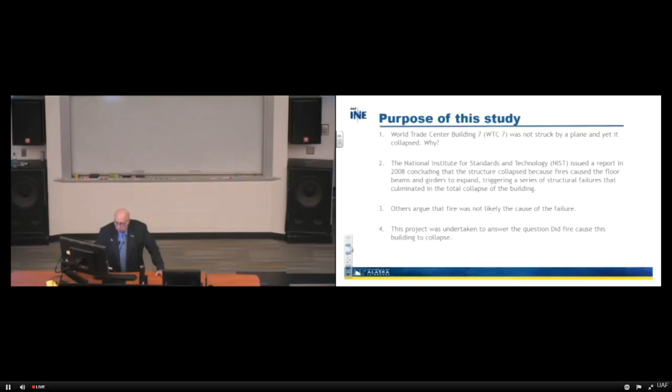Today, the methodology, I want to share that with you. We assembled first the available documents, construction drawings, etc., that were available for this project, for this building. Traditionally, I would have liked to have had the opportunity to go in and pick up all the pieces of the puzzle and put it back together like you would a typical airplane. They did not exist. It wasn't available.

So we've done the best we can with all the available documents, and basically what we did is create an AutoCAD drawing that we used to create a virtual geometry of this 47-story building. In digital form, you should be able to see every piece, every puzzle, every member, and it should look exactly like what was used in that structure. And so that's what we did.

We then prepared an Abaqus nonlinear computer model for the connections and for the framing of this building. That is a fairly sophisticated finite element program that's available that enables you to look in detail at how something is going to respond under a set of conditions.

So I know I have a mixed audience here. I'll try to keep it as simple as I can. At the same time, I need to share with you some pieces of complexity so those in the technical arena have an appreciation for the fact that, okay, they did look at this in a fairly sophisticated way. There's several things here that I haven't talked about.

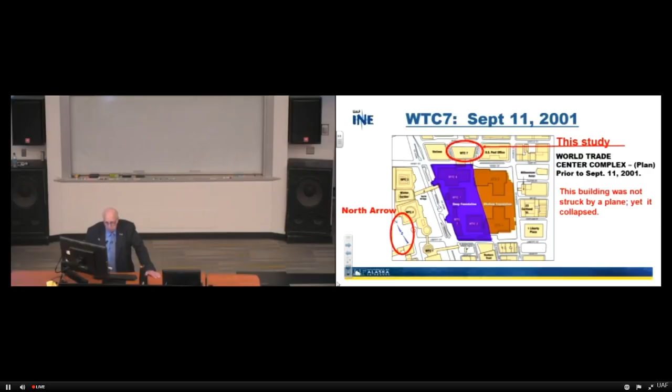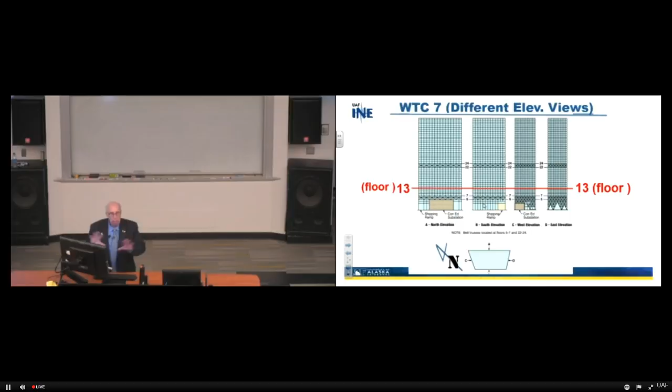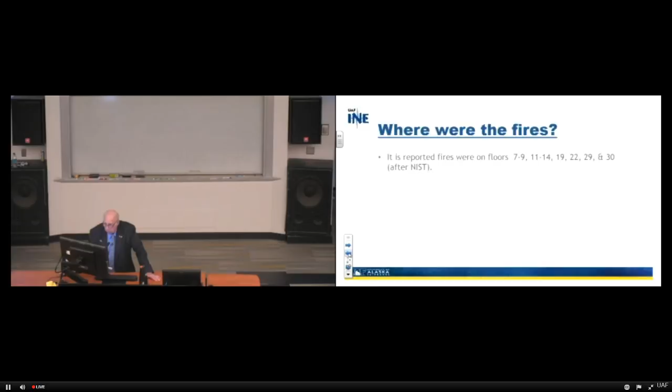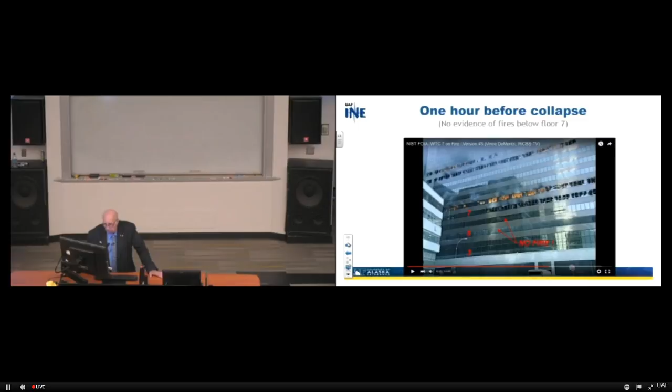All right, so now moving on with that idea in mind. We've got all that captured in our minds, we're ready to go. So there were no shear studs installed on the building girders.

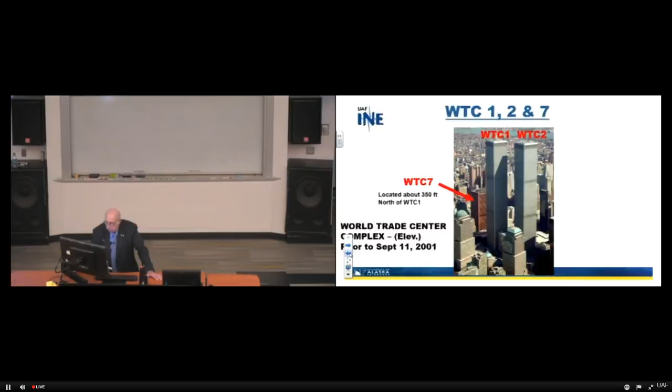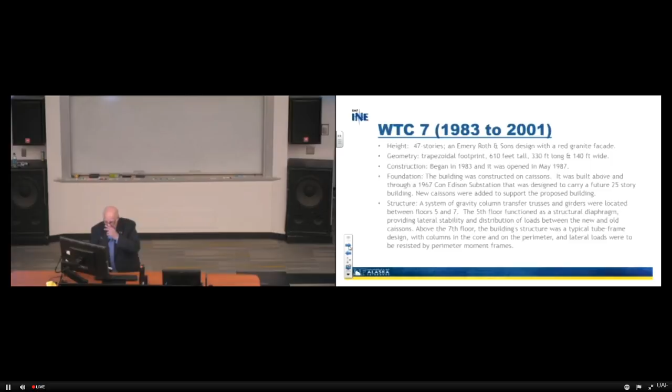Okay? So, going backwards here or something. Hang on a second, I'm going crazy. Too much fun. All right.

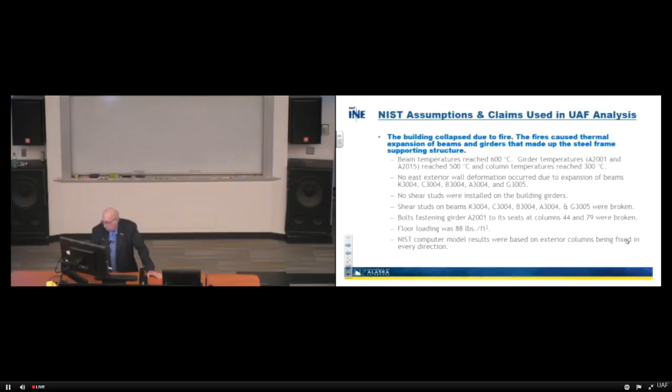So they've lost those supports. That means those two columns no longer have lateral support at that level, and did they possibly have a problem later? The floor loading was 88 pounds per square foot. The NIST computer model results were based on exterior columns being fixed in every direction. That's kind of a significant thought.

All right, so now, looking at their plans, this stuff came out of the NIST report, page 343, 2008. This gives you the geometry, that's a 45-foot length from 44 to 79. 45 foot, that's a girder length, longer than this, for sure.

You see what I'm saying? That's not small. This is a huge building, 600 feet across. I mean, for God's sake. So here is 50-some feet here, 54 feet across. This is our exterior wall. I'm in the northeast corner of this building. Is that clear to everybody?

Here we are in that trapezoid world. Notice that there's asymmetric framing. These beams, those beams, for God's sake, are 52 feet long. That's not small. I mean, where in the world do you see that kind of stuff?

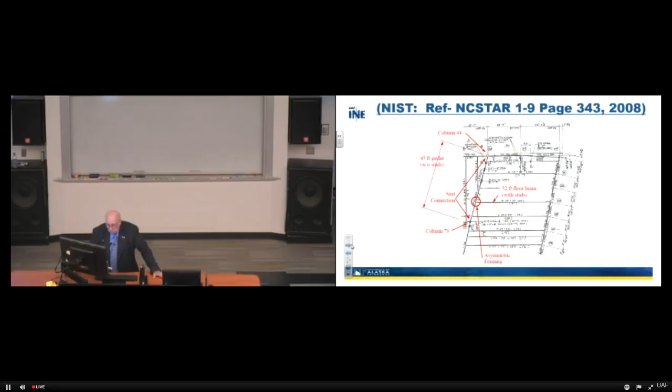So anyway, in their view, by taking a heat model, putting fire on it and then subjecting their finite element model to an increase in temperature, they got a thermal expansion. Their thermal expansion looks like this.

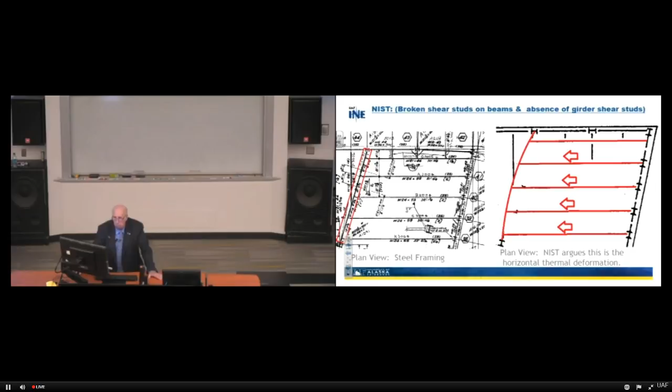So that actually is this girder right here, A2001. It expanded, and they said it pushed off of this seat, bearing seat, and thereby they lost support. And then these cascaded downward, okay? So that's basically what we're talking about here. There's that girder I'm talking about, there's that exterior, and here are lateral supports for this beam system through here.

So what were their conclusions? First of all, their fire-induced weakening of critical columns did not cause WTC7 to collapse. Okay, didn't get hot enough. They're saying that 300 degrees is not hot enough. No argument. Temperature in column 79 was below 200 degrees C. I think that's true, I might have to look that up as a reference again, but I'm pretty sure that's about what it was.

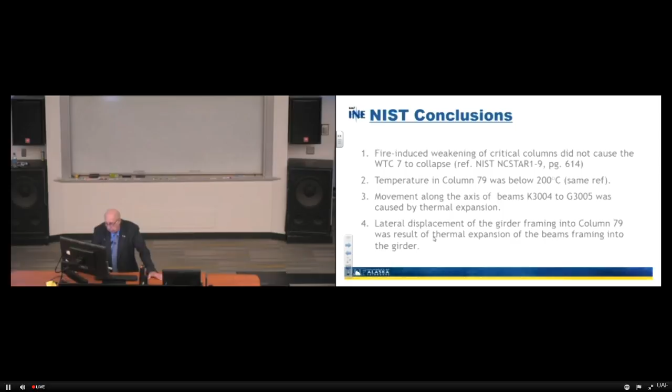Movement along the axes of beams K3004 to G3005 was caused by thermal expansion. Then the lateral displacement of the girder framing into column 79 was a result of thermal expansion of the beams framing into the girder. All we're saying here is when these heated up, they got longer. This was fixed, so they're all going to move to the left. That means they move what direction? West. And in moving so far west, what happens? Well, they're going to try to move, and is there enough space to hold them in place?

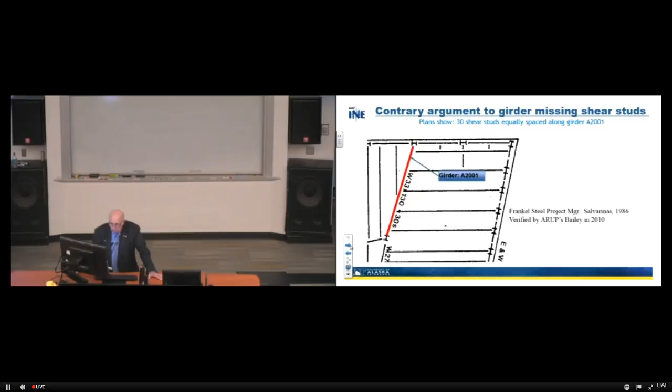That's what their argument is, right? That's key right there. And that's what it looked like. Bang, bang, bang, bang, right? This thing bowed outward. And so this moved and that moved. This is the cascade issue that they said.

Okay, so the buckling initiated here at this place right here, at floor 9. And then all these issues means that they lost lateral support of that column. This is column 79, by the way, the one we've been focusing on. That column doesn't have any lateral support, and because of that length, it cannot take nearly as much load as it was designed for. And so consequently, the vertical support and lateral restraint in the north only, and so therefore there's a huge problem. And then there's full lateral support up here, and then there's partial lateral support down below, down here at the very bottom in the kind of Edison area.

Those are all laterally supported. But between this zone, they said, went away. So the loss of lateral support for 9 stories, floors 6 to 13, caused buckling to initiate, which means you lost it. Is that clear? Everybody clear about what I'm saying here?

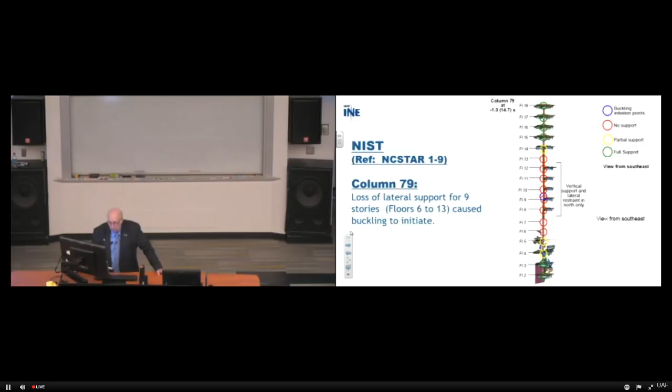Now let's take a look at their model for a moment. This is looking at a partial of that trapezoid, down here, partial. We're seeing a partial of it. This is the northeast corner. There's column 79, and in that blue, it's kind of significant. That blue is where they put, at every place a beam and a girder come together, a column to a girder goes together, a beam to all these kind of things.

There's a connection that's on the drawings that says, here's how you will build it. You bolt it together, you make it do whatever you want it to do, and that's the way it was supposed to be built. Remember that the north arrow is here, this is the west side, the east side is to my right. This is after NIST, the area of floor where connections were modeled on floors 8 to 14, and that's in the blue area.

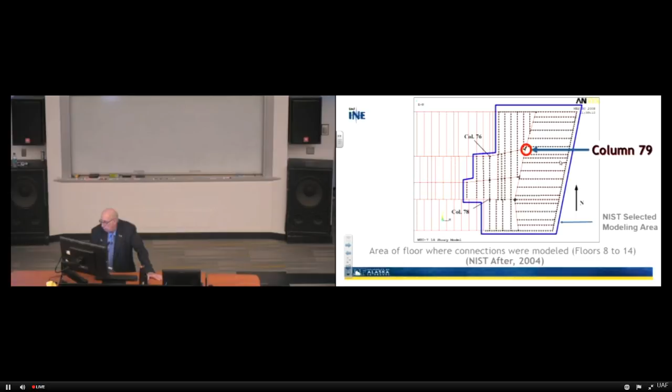Over here, that wasn't done. So there's column 79, here's the area outside of the thing, and so now let's take a look. Outside the selected area, connection failures were not modeled. NIST used fixed or pin connections.

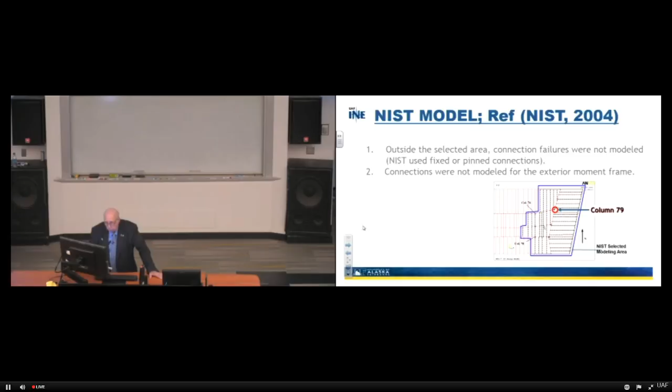So automatically, you have to ask yourself the question: do they have the same stiffness as what you were modeling here more accurately? And the corresponding question is, does it have an influence? Does it change how the system is going to respond? So the connections were not modeled for the exterior frame, and the columns themselves were treated as fixed.

Also in the NIST documentation, page 525, 2008, a girder was considered to have lost vertical support when its web was no longer supported by the bearing seat. That means if there's loss of bearing support on A2001 coming into the column 79, then it's lost. The bearing seat at column 79 was 11 inches wide.

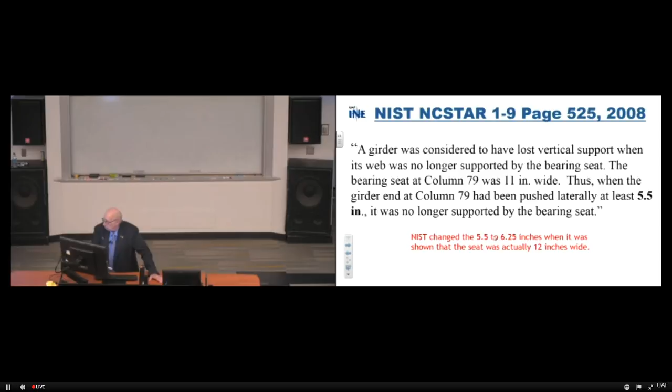Thus, when the girder end at column 79 had been pushed laterally at least 5.5 inches, the web over was no longer supported by that bearing seat. NIST changed that 5.5 inches to 6.25 inches when it was shown that the seat was actually 12 inches wide. So that's kind of something to think about. Why did that happen? And that was later.

So some of the NIST results are the following. And pardon me if this is a passion for me, but let's just take a look at what actually happened. Here's the NIST model, and remember those connections.

We're looking at this not from the south, we're looking at from the north, right? Isn't that right, Zilly? Or am I looking from the south? Yeah, that's the north face of the building. Exactly, north face of the building. So here's a penthouse up here, and here are, you're going to see two different situations here because of the connections issue.

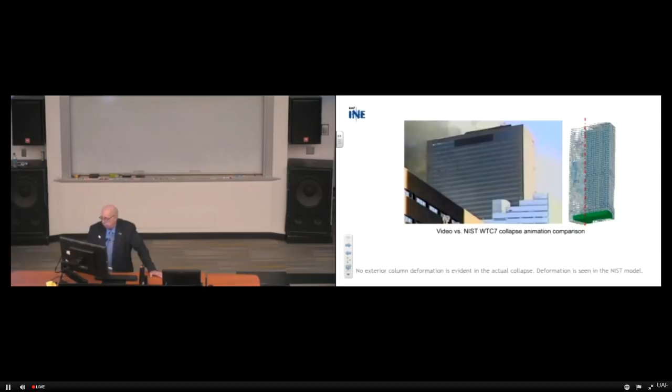Now let's see what this thing—and this is a real building. So here's their model, this is their progressive collapse, which I'm not going to show you ours yet. And here is this one, okay? And here is taking a look at the failure. Actually, that did occur that day. So one has to ask themselves, is that the same thing? Is that the same building? It looks like it behaves in an interesting sort of way.

Okay, so anyway, let's go on. Here's the NIST model that we were just looking at, and here is the other side, you see, flipped, that I'm showing you where that modeling was actually done. This is column 76, 78, and so 79 is in here. So they were looking at this finite element progressive model that they were using to look at that.

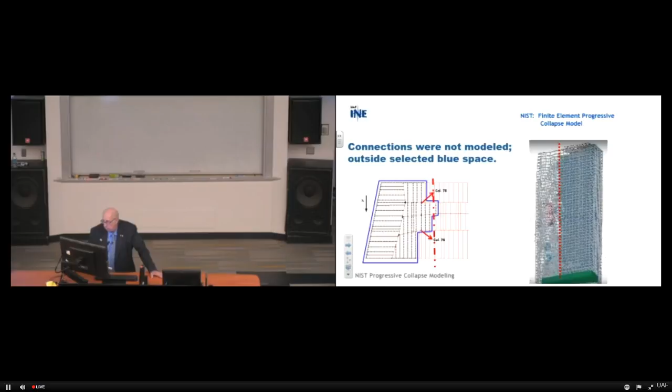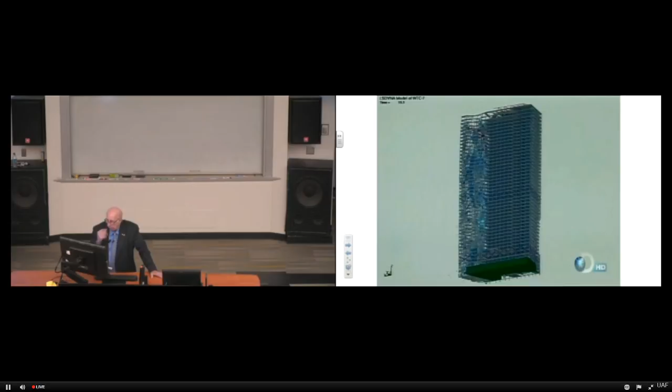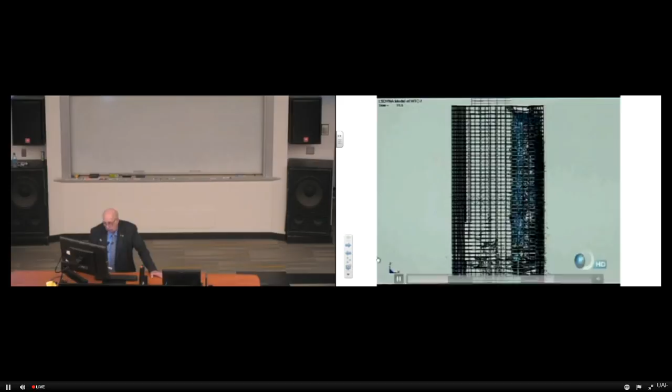Oh, I suppose we could even look at it from a different perspective. This is what they're doing. You have to ask yourself the question though, why is it so much different on one side than the other? Here's things that, because of some damage that came in from the debris falling through the windows and stuff, they're accounting for some of that.

All right, so let's talk about UAF for a moment. Analysis of the NIST collapse initiation hypothesis and propagation claims is really what we're about to embark upon, is how valid is some of this stuff from a science point of view.

So, UAF analysis of the NIST collapse initiation hypothesis and propagation: we created a solid model in Abaqus of the structural members in the northeast corner of the 13th floor of WTC7, and a finite element analysis was then performed to replicate the results claimed in the NIST WTC7 report that girder A2001 was pushed or rocked off its seats at columns 44 and 79 to initiate the collapse of the building.

So one might argue that if those things didn't happen, would the building have collapsed? So, okay, here we go. This is the area I'm dealing with, right in here. There's column 79, there's that girder A2001, there's 44 and 79. And the question then becomes, how does it behave?

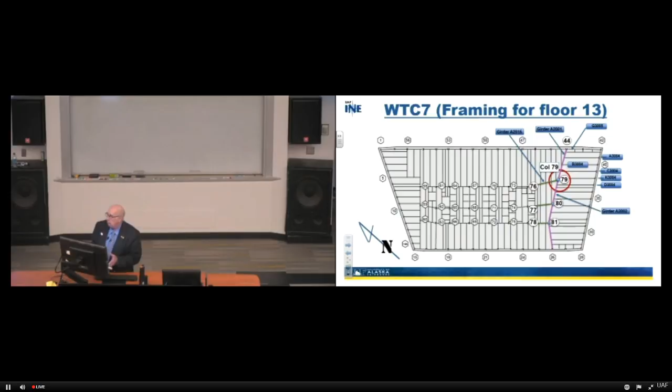So what we're going to do is create part of a finite element model, and we're going to be really conservative. We're going to force things to happen that's worse than the real world, okay? And in so doing, if we can't force failure, then it couldn't have happened. Are you with me on this point?

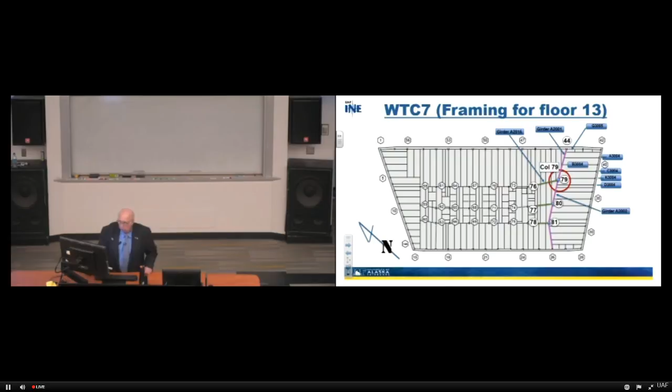All right, so that being said, we're going to fix the ends. We're going to force movement through girder A2015 by heating it up. This over here is going to be heated up. These beams are going to get heated up, and they're going to be fixed in the other direction. So we're pushing it each direction, making matters really, really the worst possible.

And this is what that model looks like before it gets run. So we don't have the entire floor system here - we do, by the way, have the entire floor system, but for this analysis, to evaluate what's going on right here at column 79, that girder, this condition, we're looking at what we need to do - that is, look at the boundary conditions to force that condition to be absolutely the worst possible.

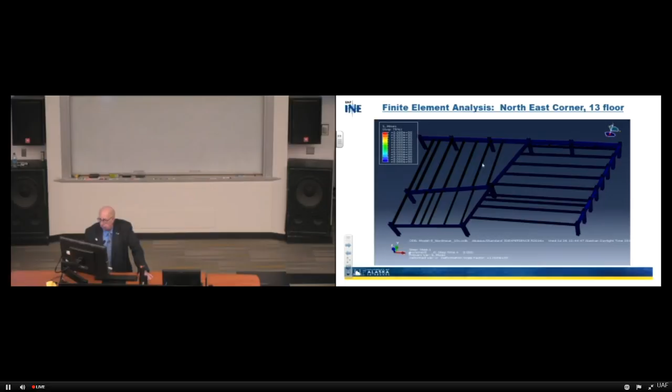Okay? We did that. And so this is the beginning - you'll notice everything's zero, the stresses are all zero, we haven't put the temperature on it yet. Okay, this is the column that we're talking about.

This column 79. This is real significant, by the way, because column 79 - do you know what I'm talking about when I say a W shape? A W shape looks like an H, and that's what we're looking at right here. That's what that column was made out of. It's a W14 by 730 standard structural shape. What that means is it's 14 inches deep, weighs 730 pounds a lineal foot. That's a chunk of change.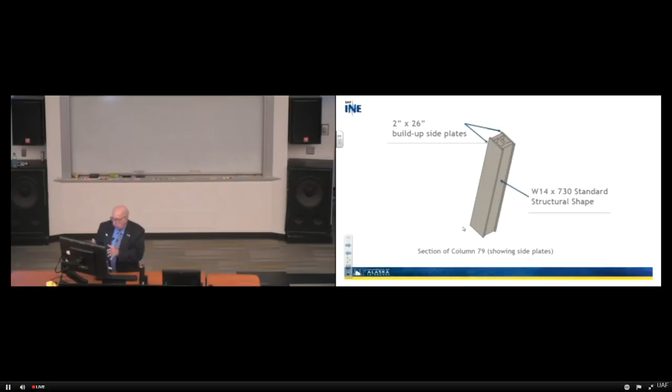Now within that context, what they did is they built side plates on it, and they closed that box. They closed it so it has structural integrity, resisting twist - significant. But those edges, those 2 inches by 26 inches buildup, means that there is a lip on each side of this, and they're going to literally put on that flange the bearing plate. Okay, are you following me? We're going to turn - that column stays vertical, but we're going to put a bearing plate in here.

Okay, so that's what it starts looking like. We're looking at it right now - plan view, A2001, going over to 44, and there's a connection to column 79. And see that lip right here? Those lips? Okay, got it? Understand? So if this thing starts moving, and it's getting shoved - if it's getting shoved to the west, which is to my left, probably your left too - then it can't get past that thing unless something happens or breaks, right? Does that make sense?

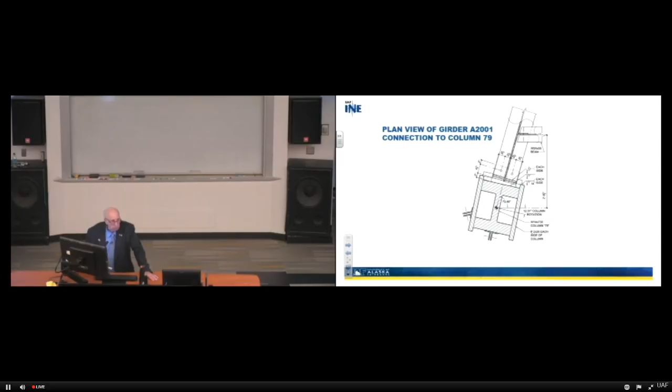And there it gets shoved. So the plan view of A2001 moving across its bearing seat at column 79, due to thermal expansion of the beams framing into the girder from the east, is here, and it gets shoved. Note that picture illustrates that A2001 is trapped by that column side plate, and it's not possible for it to move the girder web beyond the seat claimed by NIST. They're saying it got shoved off and fell down.

The fact of the matter is they didn't have the side plates on it. They weren't there in their model, so they wouldn't have found that. But yet they did exist in the structure in reality. It appears that NIST did not examine the side plate influence on the restriction of movement by that girder.

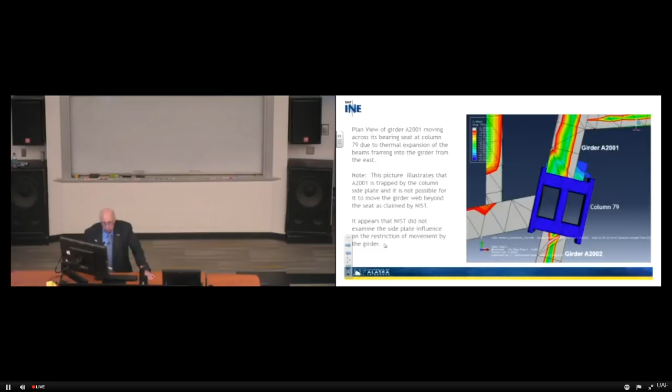Okay, so now let's take a look at what else we looked at. This is just part of the puzzle, because we've been playing this game for 2 years, so this is just a few weeks of stuff.

The model shows the influence of thermal expansion at the northeast corner of floor 13. Here we are: there's column 79, column 44, and there's the northeast corner, and here are the beams framing into that girder system. When girder A2001 is trapped behind the side plate on column 79, these beams begin to buckle.

In other words, they can't go in here. It's heating up, it's pushing, and they can't stand the amount of load axially that's been imposed upon it. So they begin to try to displace out of the way and relieve their states of stress. Are you following what I'm saying here?

So fundamentally that happens. This is out of the NIST WTC7 report, figure 8-22, showing basically the concrete slab, metal deck, all that kind of stuff. Exterior columns out here, this is basically column 79, column 44, and how that column is, and the girder here, and so forth, okay?

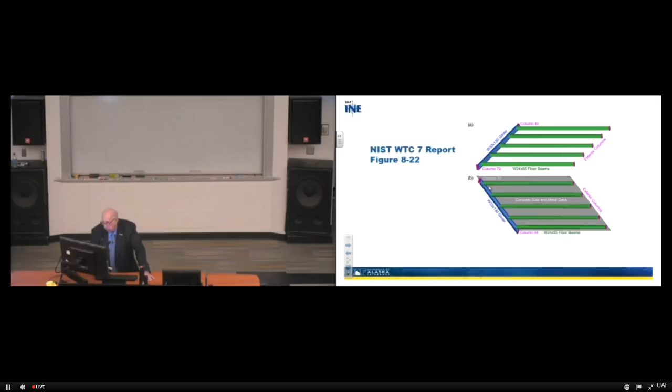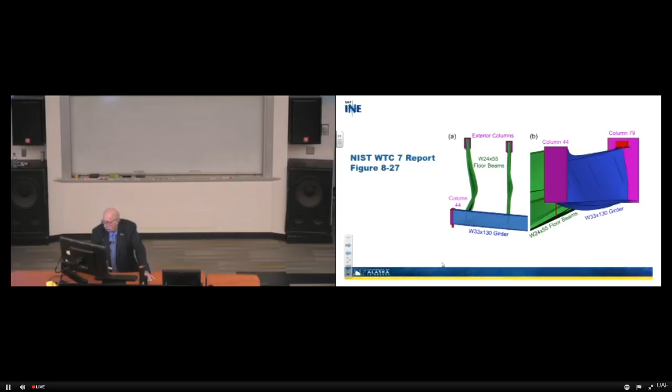And here's what begins to happen on the exterior columns according to their stuff, okay? And they did not have those side plates in there.

So let's treat for a moment the lateral support beams, S3007. Here we are in this area right here, see those little beams in here? They play a role, meaning they provide lateral support for that beam, also for that exterior.

So they're forcing them to act together, not individually. So if things actually got out of hand, you have a lot more capability from a lateral torsional buckling point of view, or an axial load point of view.

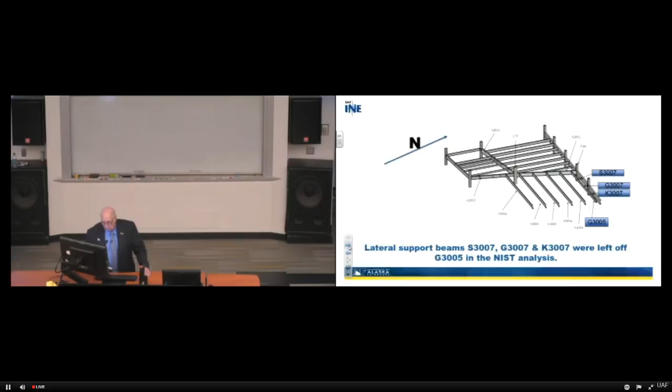And so the lateral supports were left off in G3005, okay, of this beam. They were left off. Yet they're there. So that means that something could happen, and there it is.

So UAF analysis showing beam G3005 does buckle when lateral support beams 3007, spanning to it from the north exterior wall, are not installed. Okay? So if those are not installed, it's going to buckle.

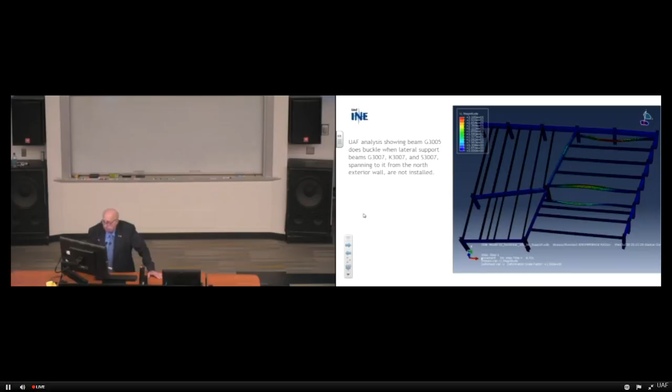So the UAF analysis also shows that that girder does not buckle when you have them in. There's a huge difference between those two thoughts and what that might mean to the behavior of this system, spanning to it from the north exterior wall as we see here.

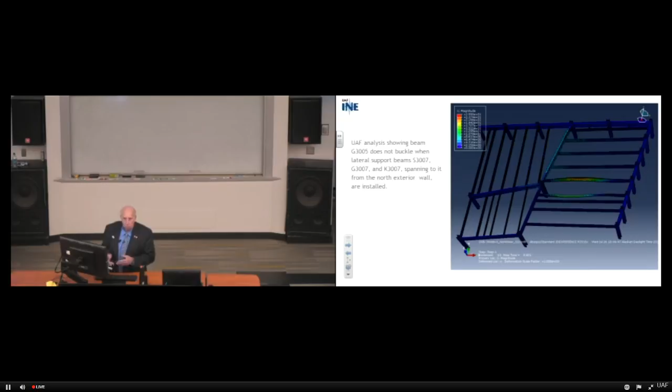Okay, so is everybody getting a mental picture of this building? You should be almost getting an intimate view of what we've been living with in this picture. Okay, let's take a moment, take a breath of air.

A view of the actual configuration of girder A2001 at column 79 from the Frankel 1985 drawing 9114, showing there are partial height stiffeners in here.

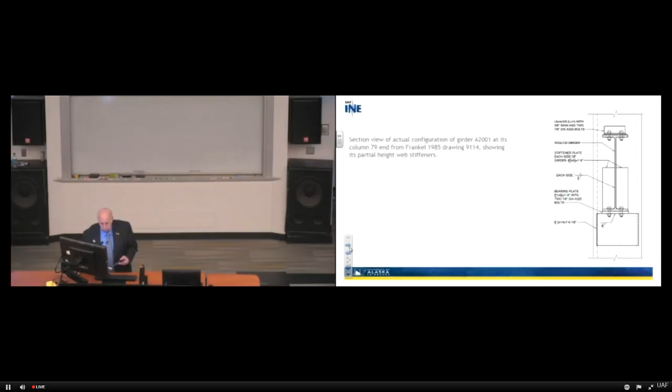Now folks, let me just absolutely tell you, this is critical. Those stiffeners prevent this web from buckling. But more than that, it prevents these flanges from getting overstressed and flexurally having a problem — if they're there, if they're there. But NIST did not include them.

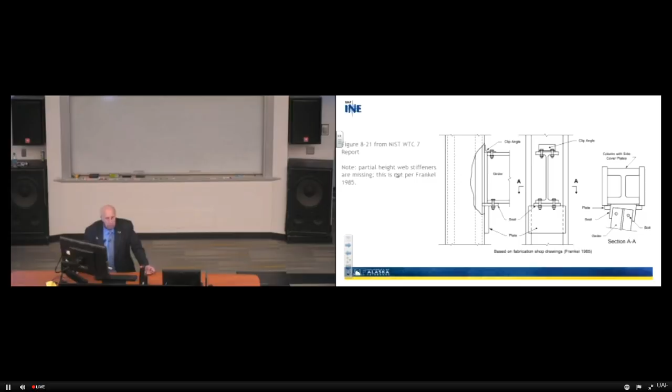So partial height webs are missing. That means there are some issues here that literally affect the behavior of this system.

So figure 823, finite element analysis from the NIST WTC7 report, note partial web stiffeners are missing. So the behavior of this interaction between column 79, A2001, column 44, the beams to the girder, the moving of the girder on that bearing stiffener — I mean, on the base plate.

Now remember, they didn't have the base, they didn't have the side plates, and didn't have the stiffeners, and all of those things are going to give you a huge added resistance to anything going on here.

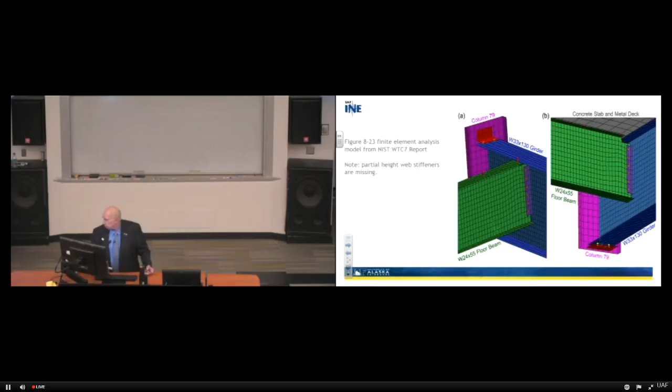And in spite of that fact, I'm going to share with you some other things that make it quite interesting. So here we go. There's what if you don't have any side plates.

So the analysis was performed forcing girder A2001 beyond its bearing seat by removing the column side plate, and increasing the coefficient of thermal expansion of the beams framing into it by 40%, so we could get that kind of movement. That's not true — we did it just to see what could happen.

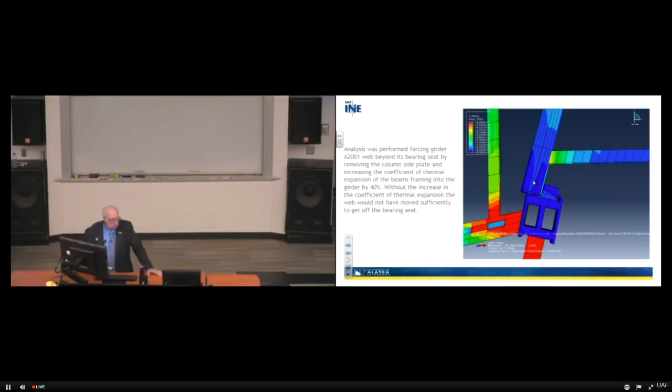Without the increase in the coefficient of thermal expansion, the web would not have moved sufficiently to get it off the bearing seat. We wanted to see if we could make it move. Okay, that's what we did — that's at column 79, that's A2001. Is that clear? Is everybody getting a mental picture of what's happening?

Again, this UAF analysis shows that the girder will not fail with the partial height web stiffeners installed. That small area of high stress is not in the load path, right here, right there. That's a point of high stress, by the way, but it's not in the load path, and it's due to the tip of the girder being compressed against the flange of column 79. This is not a structural concern.

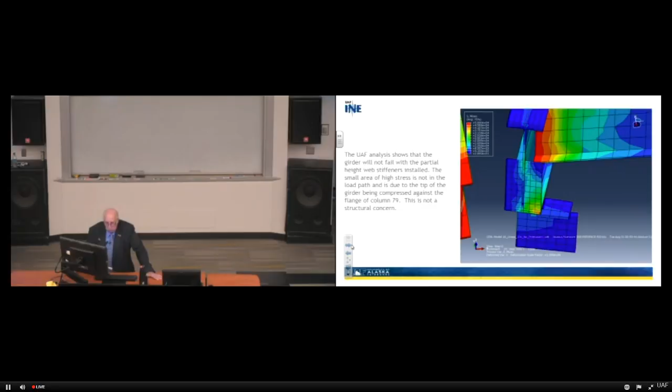It's a fact that there was some overstress there, so it's not going to cause the building to come down.

We also conducted a modal analysis showing the 52 Hz frequency mode of the falling beam and girder assembly, which was needed to calculate the combined stiffness of the contacting structural members and the subsequent impact load on the girder below the 12th floor.

So here we are on the 13th. It falls, drops off of that base plate, drops down, beams go, girders go, concrete goes, all that stuff happens. You're going to have stiffness involved, you're going to have F equals MA involved, you're going to have those conditions, and so we looked at that.

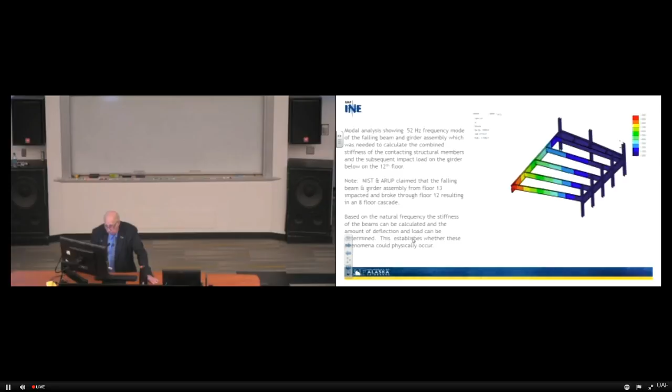The NIST and ARUP claimed that the falling beam and girder assembly from floor 13 impacted and broke through floor 12 in an 8-floor cascade. Based on the natural frequency, the stiffness of the beams can be calculated and the amount of deflection and load can be determined. This establishes whether the phenomena could actually physically occur.

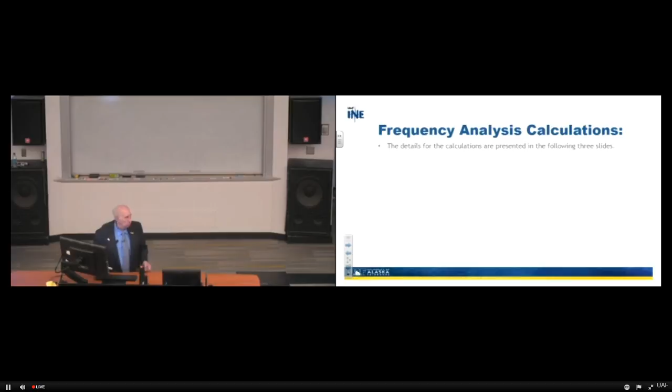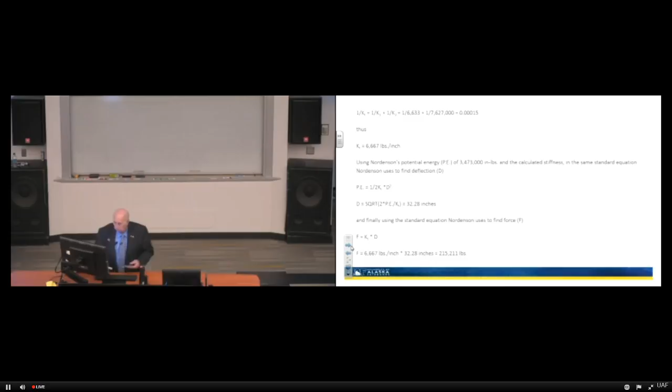I want to just share with you, I'm not going to spend any time on it, but those calculations are in the following pages. So we did that to examine that issue, and that's where they are. You can go, at night while you're relaxing, you can read these. But I'm not going to read them for you.

So anyway, we had this 215,211 pound impact force, which is only 34% of the 632,000 force required, and thus insufficient to shear the girder bearing seat welds. The northeast corner floor 12 would not have collapsed if a girder at floor 13 came off its seat. Thus, the ARUP analysis did not show a basis for propagation, even if the girder were to fall off its seat in column 79. These findings illustrate the ARUP's explanation is actually invalid.

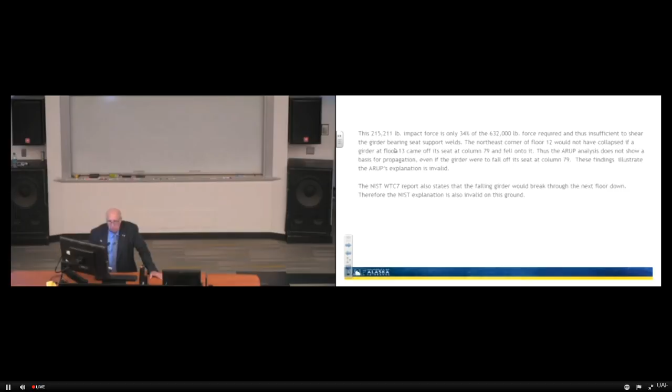That's another group, by the way, so there's more than one group involved.

Weidlinger Associates' report, this information is going to be presented a little following this, so here that is if you want to read it. I originally had a change to this, and it looks like that change didn't get made, but I broke this out. So anyway, let's talk now about our approach, which is looking at things from a different perspective.

There was a 5.5-inch movement at the girder bearing support column 79 according to the NIST. The issue that led to that 5.5-inch movement was non-composite action at the main girders. Now, what do I mean by that?

So you have concrete floor slabs, and on those concrete floor slabs, you have to decide how you're going to build it. Are you going to build it with shear connectors to the flanges and make it act as a system, or are you going to leave them so that they can slide? So I looked at it both ways. I looked at it and said, okay, what if it slides? What if it's so lubricated between those flanges and that concrete, there's no resistance to movement?

What if there's friction between it? We looked at that. What if it's partially composite? What if it's totally composite? So all those, we neglected thermal expansion of the concrete slab, separated the connection modeling, missed web flange stiffeners were looked at. So all those issues are going on there.

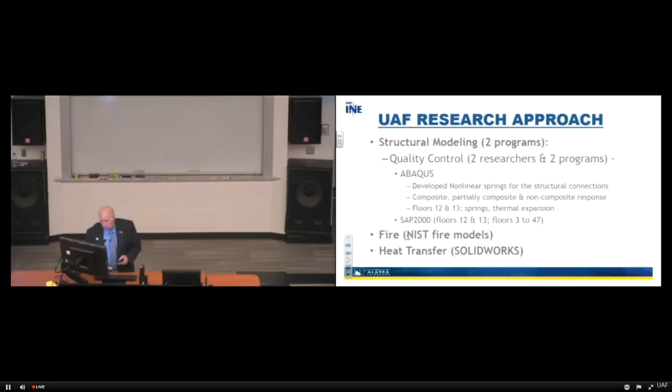Here's what we did do though. We used the NIST fire models to look at this, and then we looked at heat transfer using SolidWorks, and we also used ABAQUS to do that. The steel framing, connection columns, and beam girders were considered throughout the entire floor, not just part of it, by the way, not just part of it, all of it.

So nonlinear springs on all stories is something we haven't finished yet, but we've looked at it. Substructuring frames and concrete floors were used to minimize computer time.

So it's my understanding that some of these computer models were taking up weeks to run. I went to a substructuring system where we could run them in less than an hour, maybe half an hour, maybe even less than that. I'm not sure. They ran really fast because I took out all the complexities and replaced them with equivalences. And then if we wanted to know what was going on within those equivalences, we put that stuff back in. So we could save huge amounts of computer time.

Heat transfer was studied, and we looked at the floor tile over the concrete with welded wire fabric, stay-in-place forms, and flutes. So these were stay-in-place forms, by the way, and there's a flute. What does that mean? It means that there's a steel...

I guess I don't know how to share that with you. Imagine if you take just a straight line and you drop it—I guess a little square hole, you would say, and it's long. And so that space is a place where they don't put in concrete. It's an open space. Saves concrete, you still get strength, and that's the flute.

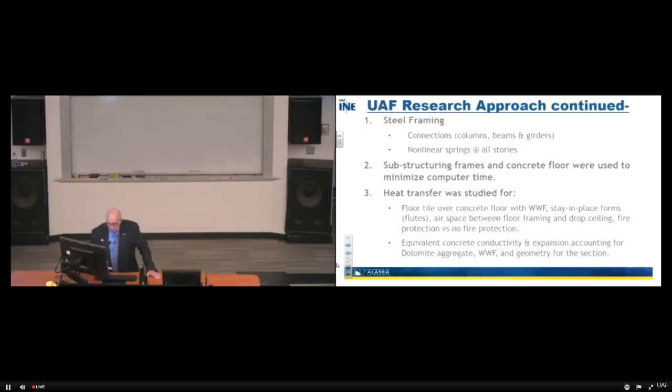It's 75% of the product. So therefore we need to know what it's going to be. And I had written a paper on this subject some years before and had a pretty good understanding of that.

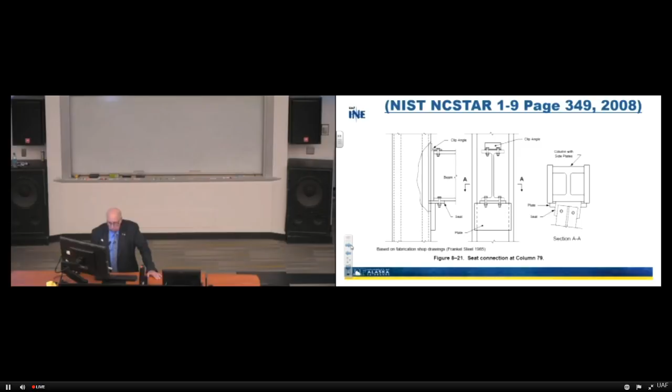So this again is the NIST seat connection at column 79 that they did, but you know, they didn't consider those stiffeners. So here's the way we begin to model the actual system, the way it went together. Here are those side plates. Notice that they're there. Here's the girder coming in, and there's the partial height stiffeners. And so therein lies—they actually were there, and we began to model this from a computer program to digital, so we knew how this thing is going to behave when you put it together.

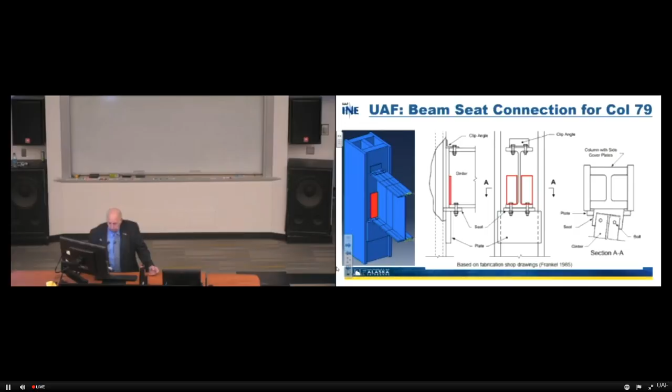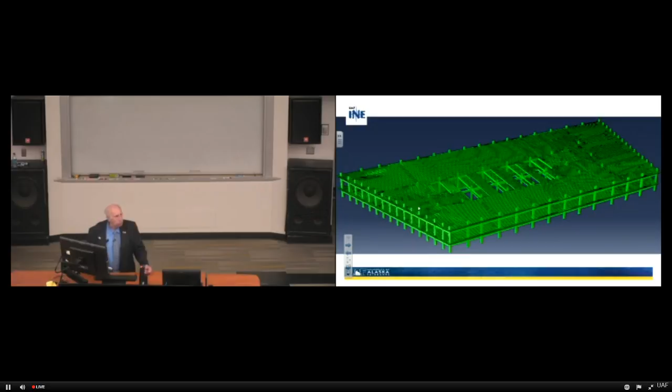Here's what that floor system actually looks like. By the way, these are elevator shafts. This over here is column 79. There's that column, there's column 44. There's the exterior of that floor. There's that whole system, all right? That's an ABAQUS model, by the way, that we're looking at.

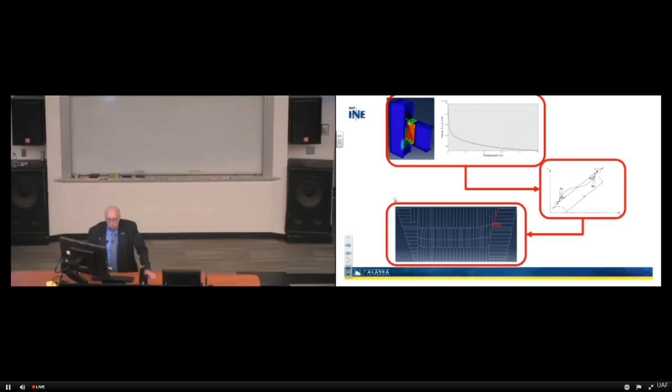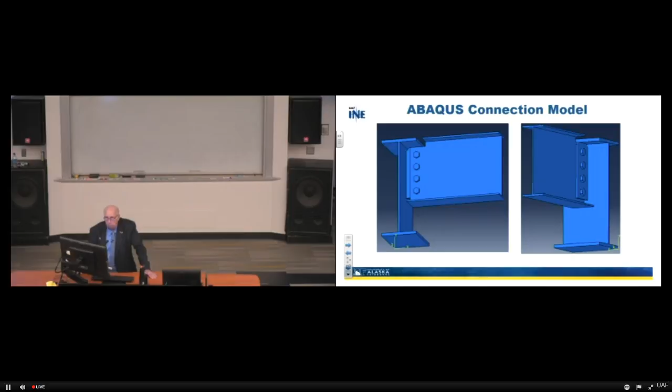So we threw that away and replaced it with an equivalent to save time. Then we looked at the fin connection, same idea. I'm not going to waste your time. That's how it was put together, and there's how it's actually put together mathematically. That's what it starts looking like as a behavioral system. We plotted a curve for it and got a spring system out of it. Same idea, and so forth. So basically, we put a load, plot its behavior, and from that we put the equivalent into it.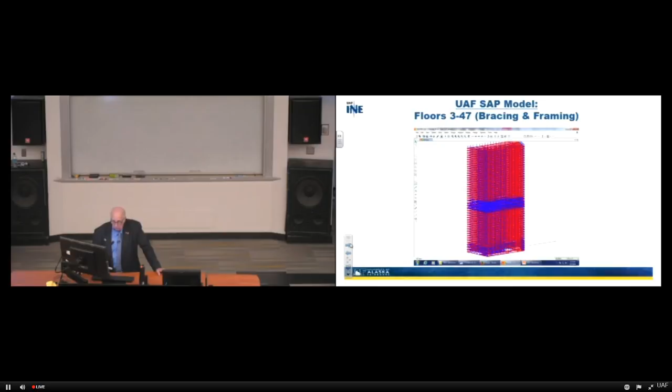Let's take a quick look at the materials that went into this, just a little bit. The steel was ASTM A572, yield of 50,000 psi, thermal conductivity of 35 BTUs per hour per foot per degree Fahrenheit. Here's the thermal strain value, density about 490 pounds a cubic foot. We also had some ASTM A36 steels, though I'm not showing all of it. Concrete's 28-day compressive strength was 3,500 psi, density about 145 pounds per cubic foot, with dolomite aggregate. We got a thermal conductivity and equivalent conductivity from it, and thermal expansion.

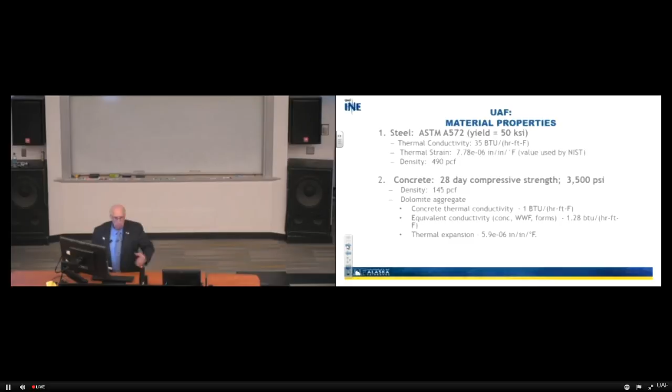So that's the kind of stuff that made up the model to simulate what we thought the building was going to be. We fixed the exterior column wall line here, as did NIST, and subjected it to that heat-up model, getting a very similar result. This is not the NIST model, I apologize—this is our model. Here we have the connections as they truly are, all along this system, throughout the entire floor system, how it actually was built.

Then we heat it up, and by heating it up we have a dead load here of about 5,142 kips. We have a movement of that section of almost 2 inches, but not west—it went east. Totally different: the floor moved east at column 79, not west. And by the way, they moved together, not separately.

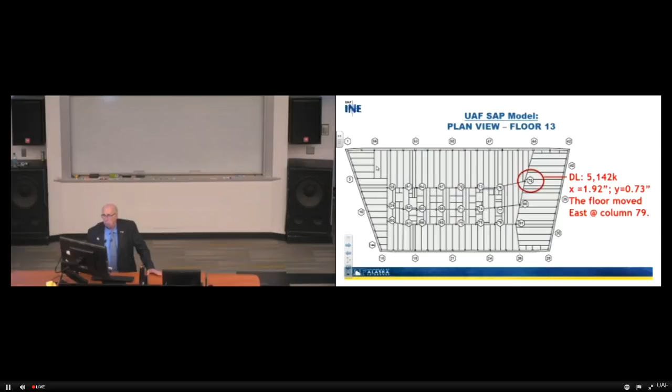Here's the material response versus temperature, and here's the column 79 capacity curve as a function of temperature. You can see even dropping down into here, you don't get much change—column 79 at 392 degrees Fahrenheit. This is load capacity versus effective length for these various temperatures. This is 1,832 degrees Fahrenheit. I think you can see it can make a huge difference in the capacity of that thing.

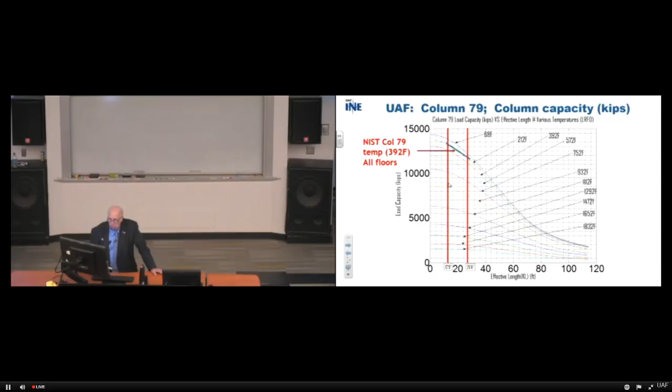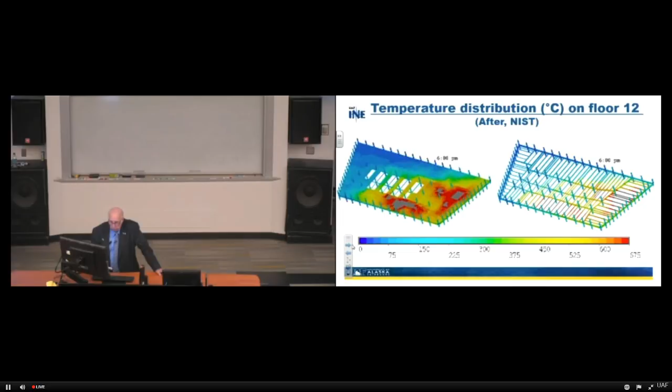So let's talk about the fires we actually put in this building. Here's what was on floor 12, that whole area at 6pm, and then there's the fire. That came from the NIST models, and we used them at this point. Same here on column 79, floor 12 and 13, UAF Abaqus structural expansive movements—just wanted to share this with you.

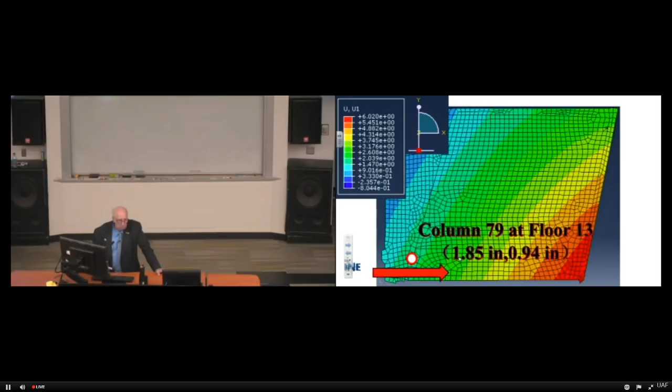This is the model we're talking about, this is floor 13. This is column 79 at floor 13, 1.85 inches to the right—that means east, not west. So this whole thing moved. I'll show you a different picture here in a moment. So this is all this stuff to the east of this.

You can begin to see the displacements if you start looking at minus 0.50—where's the zero at? It's over here somewhere. So here's column 79, moving with respect to this area, not moving with respect to this, not moving with respect to that. It's moving this way and that way with respect to what we call the thermal centroid, which is your stiffer point. So basically you have a center of stiffness by which this thing is behaving, and that's what's happening here.

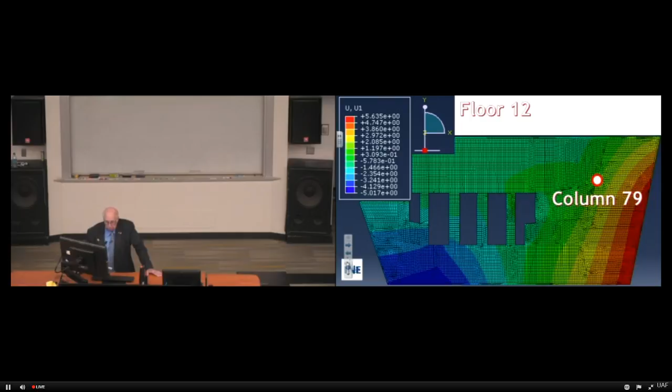Notice our results in the SAP model, column 79, show 1.92 inches to the right. Abaqus—this is SAP, 1.85 in Abaqus—we did it two different ways and got very close to the same answers. NIST shows 5.5 inches to the left, revised to 6.2 inches. And why? Because of some of the things I was telling you, understand? In my view.

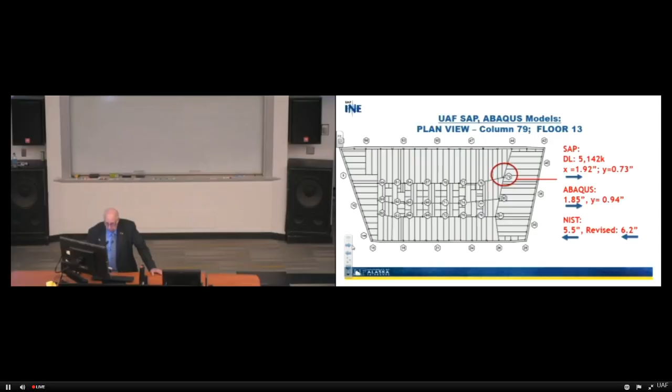So let's do a little comparative game. Floor framing, steel connections - we accounted for them, NIST only partially.

We have exterior steel framing connections included as springs. They did not. I'm talking about the exterior walls - they have them fixed, remember?

Floor is composite with beams and girders. I'm sorry, girder to column stiffener plates at column 79. What about the floor composite with beams and not girders? Both of us considered that. Composite with beams and girders - yes, but they did not.

Thermal expansion of the concrete deck - yes, but they did not. Thermal conductivity and expansion of material properties - so what I did is I went back and got the aggregate, then changed it to make sure we knew what the thermal conductivity and thermal expansion of that concrete would be if they actually matched it to the aggregate type. And so we accounted for that, they did not.

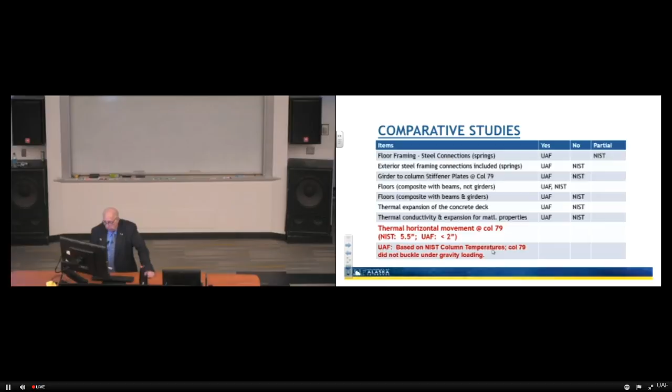Thermal horizontal movement at column 79 was less than 2 inches. Therefore, based on our analysis, column 79 temperatures were such that it did not buckle under any gravity loading. Couldn't have happened. So did Building 7 collapse from fires? No - this is based on our calcs. This contradicts the findings by the National Institute of Standards and Technology, the NIST approach.

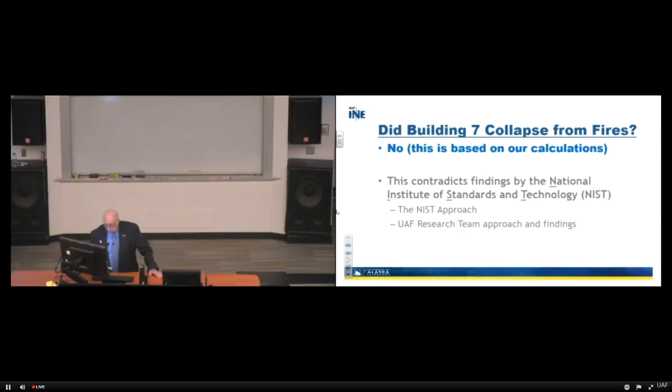So that was what I view to be the real way it actually behaved, not what you assume, not what you do in terms of boundary conditions, making things perhaps easier for yourself or whatever.

So the concrete floor diaphragm stiffness is significant, even with no shear connectors. Frictional resistance to thermal expansion is not trivial. We noticed that if you take out those shear connectors, as they argue they're not there - take them out, I don't care. When they go away, I have enough friction and enough shear connectors on the beams that it doesn't matter, it's not going to make a difference. So that's what we determined, and we looked at it both ways.

The thermal expansion of the concrete deck cannot be ignored, and it's likely less than the steel. The value is highly dependent on the type of aggregate. My research shows that thermal expansion of concrete can be as low as 2, all the way to 12, whereas steel is about 6.5, depending on the aggregate. So we were dolomite aggregate, and matched to whatever we had there.

The research team evaluated fire by considering the airspace below the beams, in the space between the drop ceiling and the structural steel framing. We did that because a number of people felt it was important. The result is that fire underneath will likely burn through the drop ceiling quickly, and its resistance to heat transfer is likely not available to help.

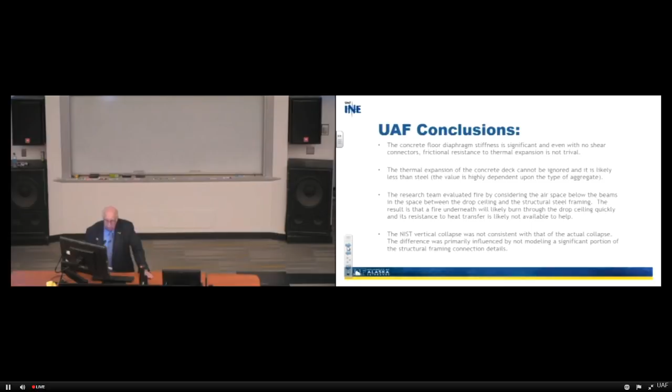So the NIST vertical collapse was not consistent with that of the actual. The difference was primarily influenced by not modeling a significant portion of the structural framing connection details. There may be other issues, but certainly that had an effect - there's no doubt about that.

What's new? What's next? Well, we welcome your input - we welcome input from the world. We would want to be able to make sure that our findings are based on scientific fact, and if there's a question, we're there to try to answer that and make sure our results are true and of value. We're providing the study to be peer reviewed.

We are examining progressive collapse caused by various conditions, such as failure at the substation level, shock waves imposed by falling debris from Towers 1 and 2. What about the radiant heat that was imposed on that building structure by Towers 1 and 2 when they heated up under the planes?

I'm interested in examining the building response for various columns being removed. We've already removed the inner core - I'm not sharing that with you, but it's very impressive what's going on. So then the question is, what else is going on?

And we're examining issues related to the perimeter trusses. There's been a lot of questions about what if they had a problem - what would that mean to this structure?

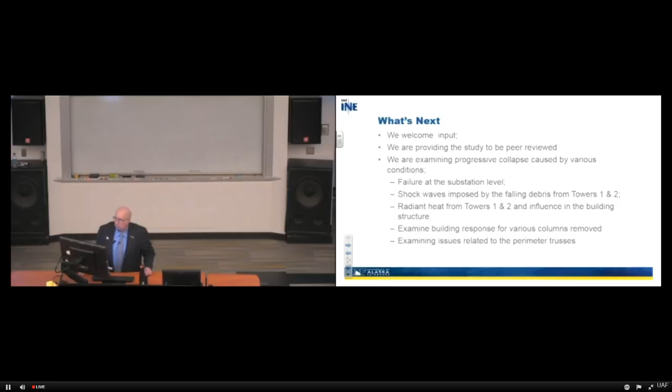We'll take some questions.

You mentioned that NIST did not model, for instance, the partial stiffeners and some of the shear connectors. Was there reasoning? Did they not find that in the wreckage and they don't think it was actually on the building? Or did they do that to make it easier to do the modeling?

I don't know the answer to that. I think it was an oversight. I don't know how they got to that level, but I think it was an oversight. I'm not here to criticize, I'm simply here to make sure that we did it the way the building was built. Try to answer that question as best we can.

Yes. For the people online, I should probably give you the microphone.

I guess I'm still a little bit unsure. When you said NIST revised their figure, they added an additional 3/4 of an inch or so expansion. Maybe I missed it, but what exactly did they cite for revising that figure? What was the variable they introduced that said, hey, we were wrong, there was an extra 3/4 of expansion?